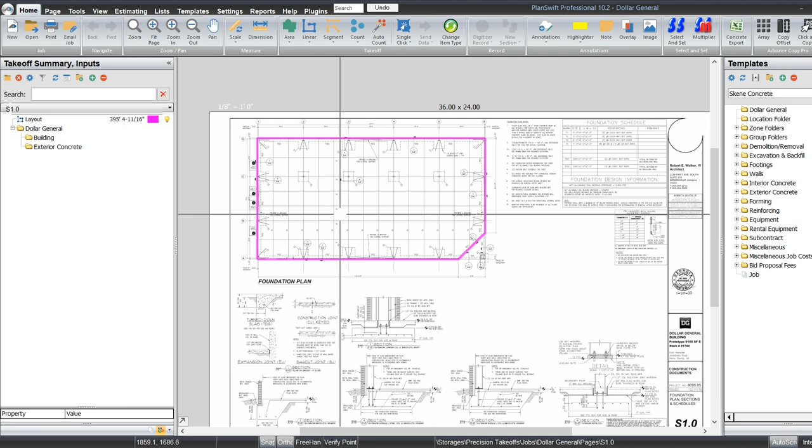I already got my folders put in there. We have separate videos on that, obviously, if you want to use the folders and how to use the folder structure. So we'll just get going on the takeoff here. The first thing I'm going to do is jump in and get these interior footings here. So we got some F3s, 6x6x2. So we'll just jump in here to our footing folder and grab some stuff and start going here.

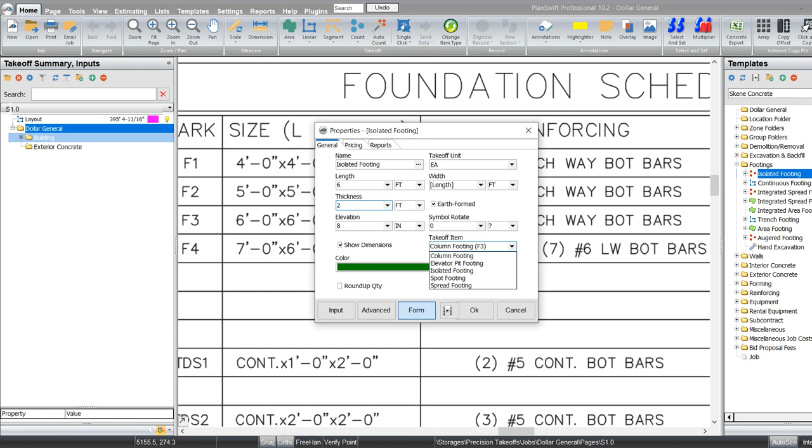So again, all the assemblies are drag and drop, even the digitizer ones. I know the standard PlanSwift assemblies are not like that. You cannot drag and drop them. But ours within our plugins are. So we'll just input the information that we need. That will be earth formed. An elevation, we'll have to check on that. And I always name them here just so I can keep it straight which ones they are. Looks like that'll be good there. And we'll pick up the rebar, 7 number 6s each way. We'll pick that up here in just a minute.

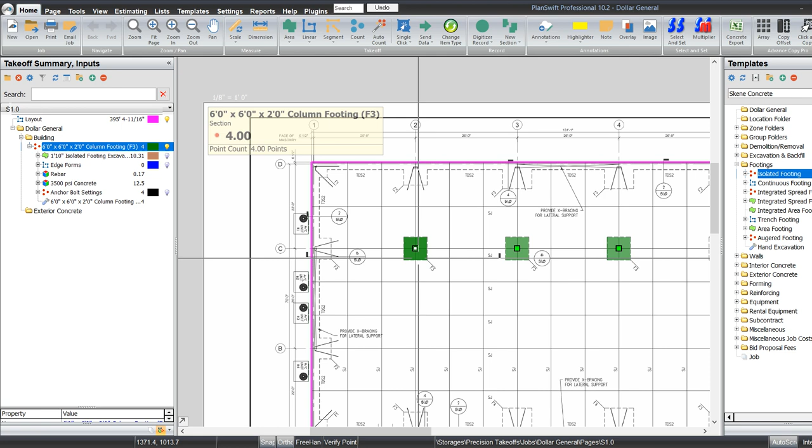So we'll go ahead and just draw these out real quick. And there we go. And we'll just move them over. There we go, we got those drawn out. And again, we had 7 number 6 bars each way. 1 mat, 7, make that the same, and those need to be number 6s.

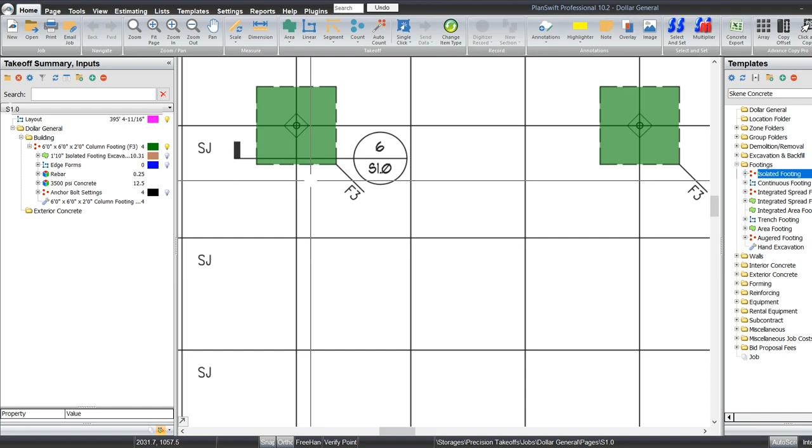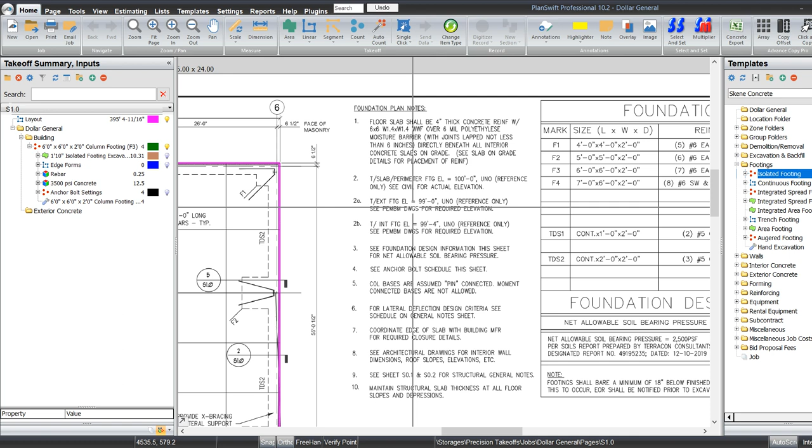Alright, let's just look at the detail real quick. I've done these enough, I'm pretty certain I know exactly what it's going to look like. Where are we at here? Right there. So yeah, just a standard column footing. It's just going to be earth formed. And top of the footing elevation, we'll have to see what we got here for that. 99'-4", so 8 inches down, and I'm pretty sure we're preset at that. Yep, we are. So we're good there. Those just have an anchor bolt coming out of them, no columns, no piers on them, and that will be it there. Those are done. So let's move on.

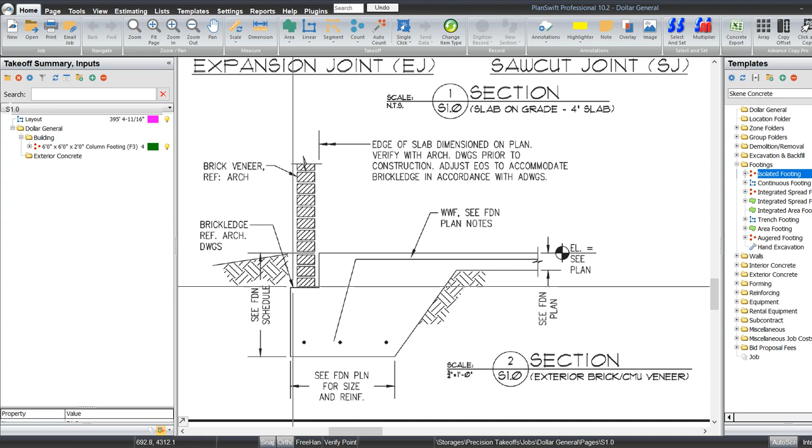And this particular Dollar General, I think it was down in Georgia, I believe. Yes. So for the detail here, we don't have a typical foundation, I guess you'd say. We just have a turn down slab with some ledge in it there for the brick. And some of the footings on the exterior, like right here, are just tied into that turn down edge, which would be right here. So pretty simple, just a little bit different way of doing that since they are all one continuous pour. We will just do it as a turn down edge.

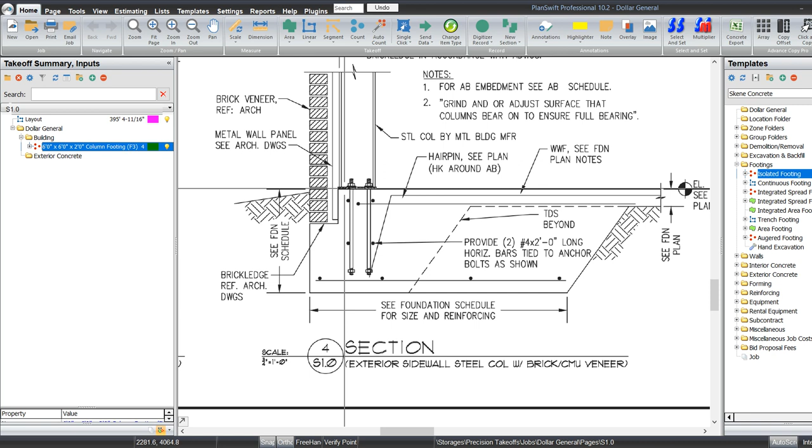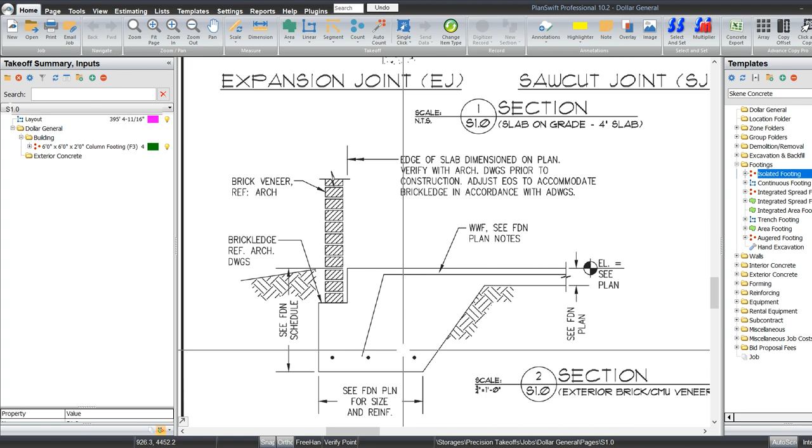We'll just throw the bar in there instead of doing the actual footings themselves, because that way we'll be able to pick up the extra concrete right there that we would not be able to pick up if we did them with the count item. Plus they're part of the floor slab pour, even though they are a footing. So what I'm going to do is draw my slab all the way out to this corner here, all the way down this edge here, and all the way out to there. And I'll come back in, put a ledge in there, pick up the turn down edge, the thickened concrete along the side, the rebar obviously, and we'll just jump right into doing that right now.

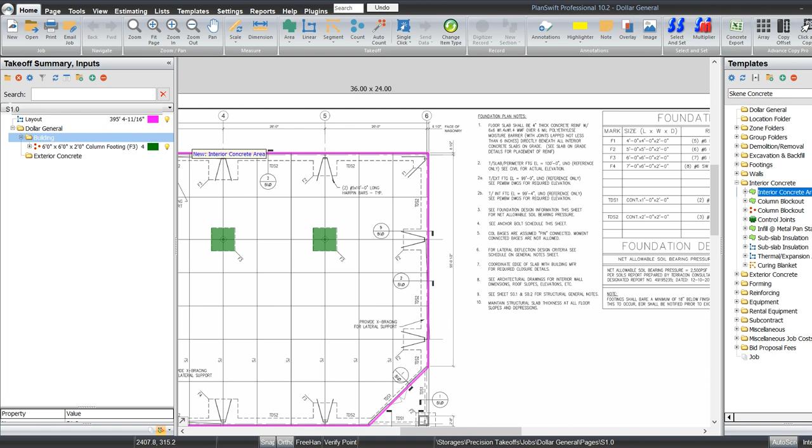I'll look at it here, but we're going to have a 4-inch slab, yep. 6x6 mesh, 6 mil vapor barrier. Okay. So again, we'll just take our interior concrete assembly, drop it in there, and the input window will pop up for us here. And we're just doing a 4-inch slab on grade. We'll worry about the details and specifics on it in just a bit. You'll see that I already have my layout done. That just makes it so I can snap to all the lines and points that much quicker. And this here, well, I don't know if that's supposed to go all the way out there or not, but I think we'll just do it out to there anyway.

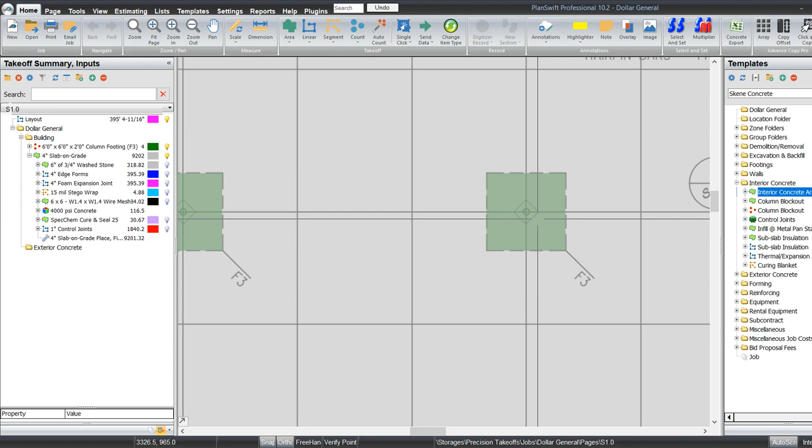Okay. So there's our slab. Obviously, we're gonna have column diamonds on top of there, as shown in that detail. Where's that at? Right here. So we'll have those to take out. We'll do those after we actually digitize the blockouts in there.

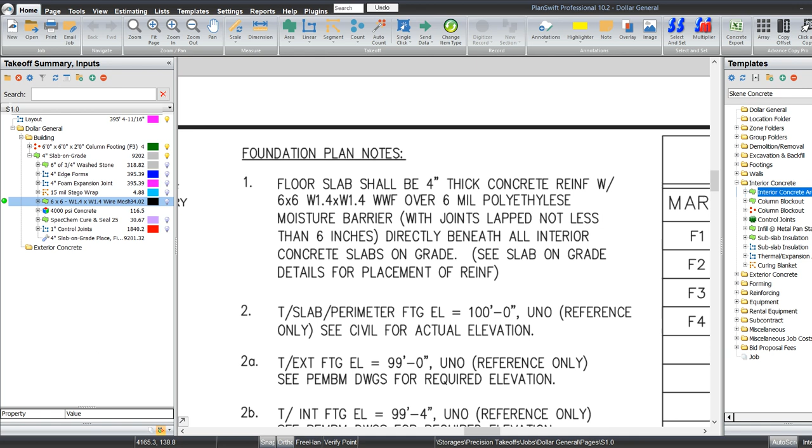But really, all we have to add here on this floor slab is, so you got a 6 mil vapor barrier. I'm going to leave that at a 15 mil Stego because I'm almost certain that's what's going to be required. 6 mil on a job like this is pretty rare anymore. We got that correct. And we'll have to check the geotechnical report for the subbase, obviously. I believe we're going to run into 4 inches on that. So I will just set that right now.

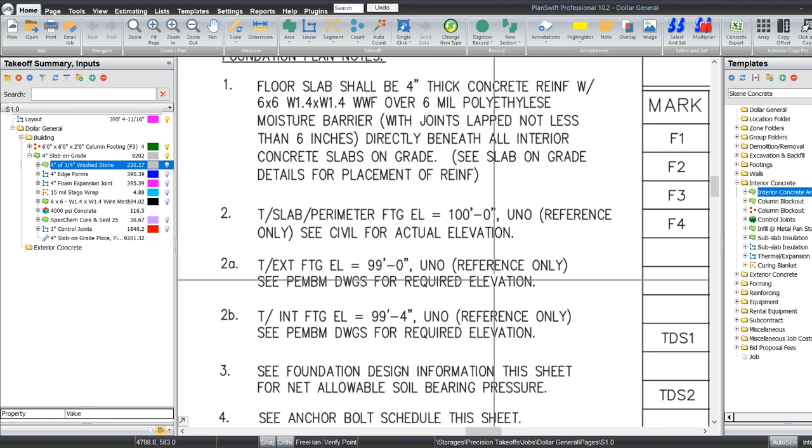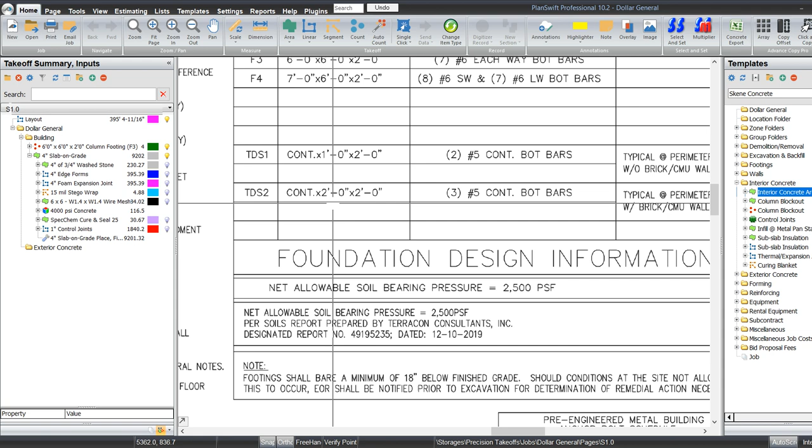And again, as I was saying, where's it at here? So yeah, we're going to have a 12-inch turn down edge. I don't know if it tells us that here. It does not. Actually, we might not, because I actually do turn down slab 2. Continuous by 2 by 2, so we're actually going to have a 24-inch edge there. So right off the bat, I'm going to change this to 24-inch plywood forms, because we're going to form that edge up. And if you've been paying attention with the videos we've previously done, you'll understand what's going on here.

Okay, so we're going to have that. We are not going to have any expansion joints. We can get rid of that one. And this here, since we have a turn down edge, we're not going to be taping the perimeter. Here in the Midwest where I'm at, we are required to tape the perimeter when we have foundation walls. Tape it onto the wall. That obviously is a non-issue with a turn down edge like that. And we'll look at the specs later and change all the concrete in the reports. Probably going to run into a 3000 mix, I'm sure. We will worry about that later.

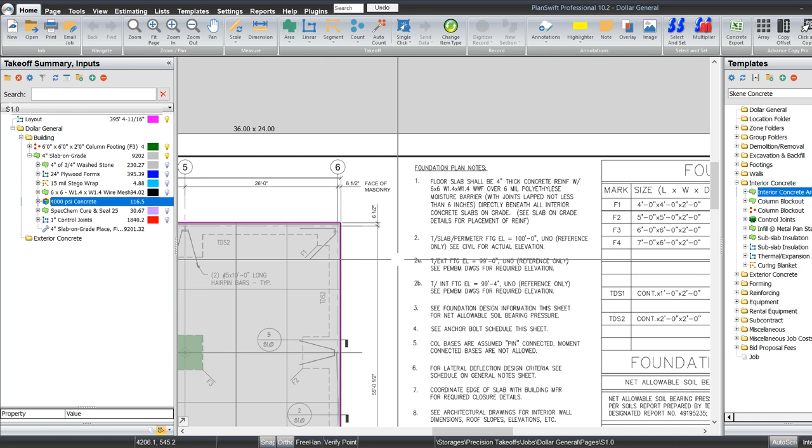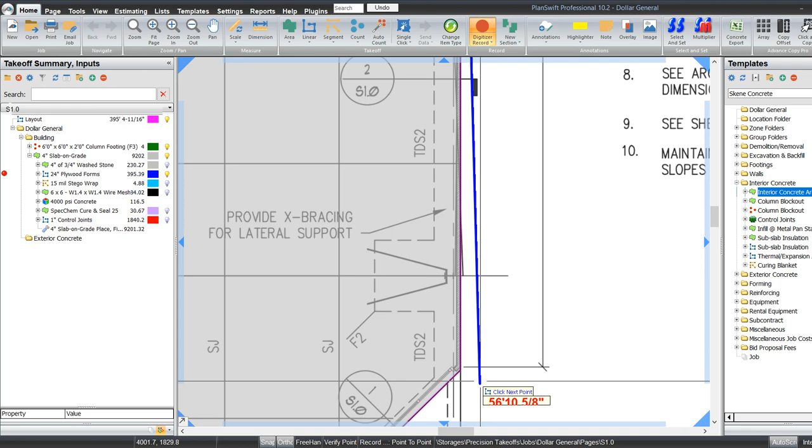So really what we need to do is, let's just start going down our list here. And turn this up to, okay. Alright, so the reason I got to draw this out here instead of just taking the perimeter, and you'll see that it's going to look the same right now until we change it, but the reason, again, it takes the entire perimeter. Once I draw it out, you're going to notice that number is the same. That number will change once I start deducting these here, and I don't need 24-inch plywood forms on those column blockouts. That's the reason I had to draw that perimeter out there.

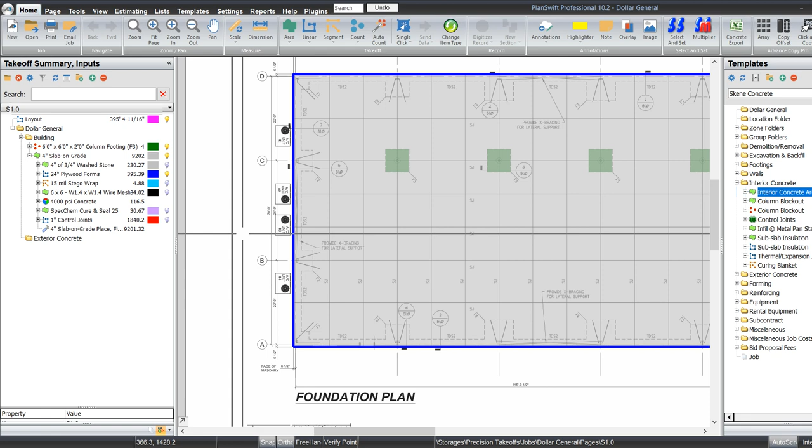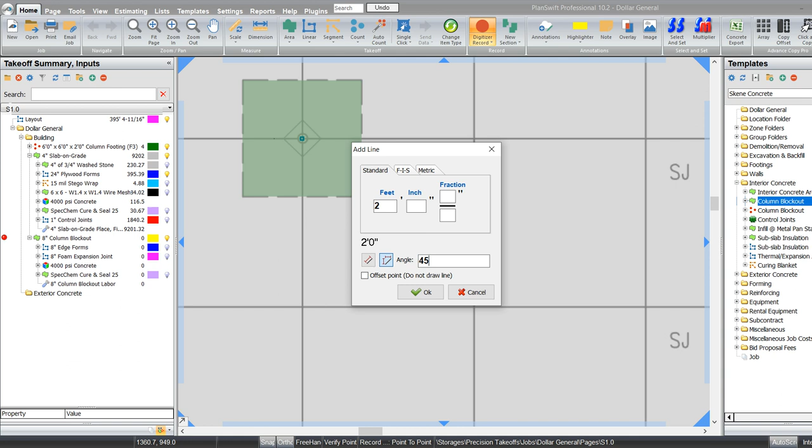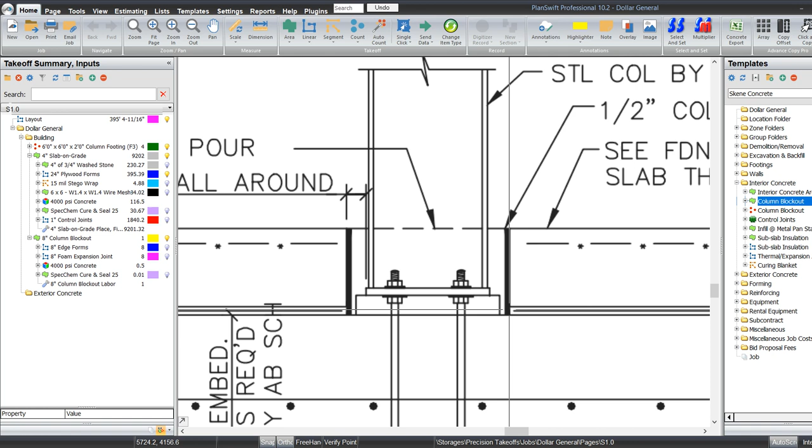And let's just get those knocked out real quick. Those footings were down 8 inch, so those are going to be 8-inch blockouts. And I always do a minimum 2 by 2 regardless of what they show. And okay, for those, again, those are just going to pick up the entire perimeter with edge forming and expansion joint also. And yes, expansion joint does go all the way down. Sometimes it only goes down the depth of the slab, which sometimes is only 4 inch. They don't pour the slab all the way down, but in this case they do. So we've got that taken care of.

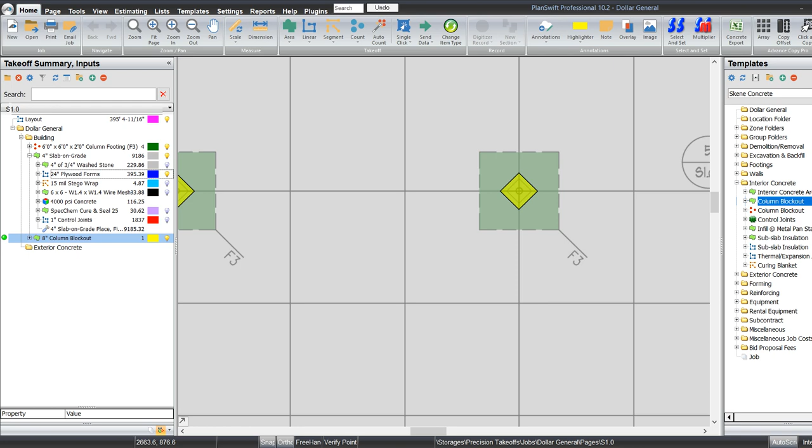So let's just copy that over. So to do that, I'll just shut that off. And there are those, and now we'll deduct the slab from that, and this is where you would have seen the edge forming change if I did not digitize it on the outside, but since I did digitize it, it will stay the same. Okay, there's those, there's our edge forming in there. Again, we'll change the concrete later, and we'll worry about sealer later. It will be a different type of sealer, I am almost positive, but we will worry about that when we get to it.

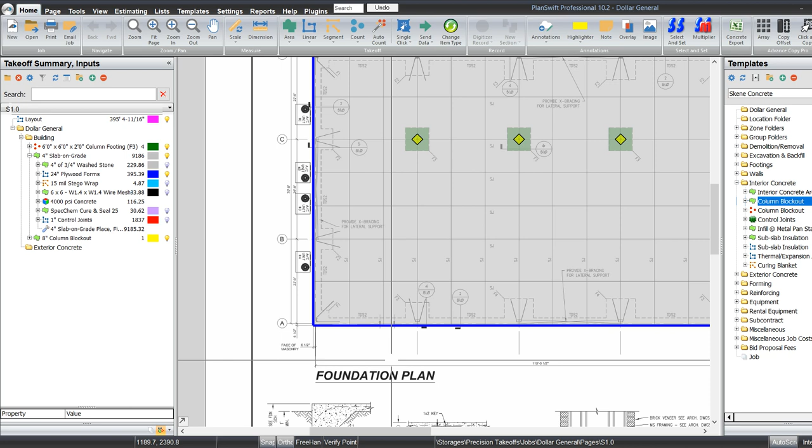So what I'm going to do, to pick that up, I'm going to drop that in there. This is just our thickened concrete. The segment part and the linear part are exactly the same. The segment just starts over for you every time you click a point. The linear, you can keep on clicking. Other than that, no difference.

So I'm going to go 48 there, 24 there. We got one slope side. We're going to do a 1-to-1. Actually, we'll check that out. It might not be a 1-to-1. And again, I'm going to label these. There's an F1. And we are going to machine excavate that.

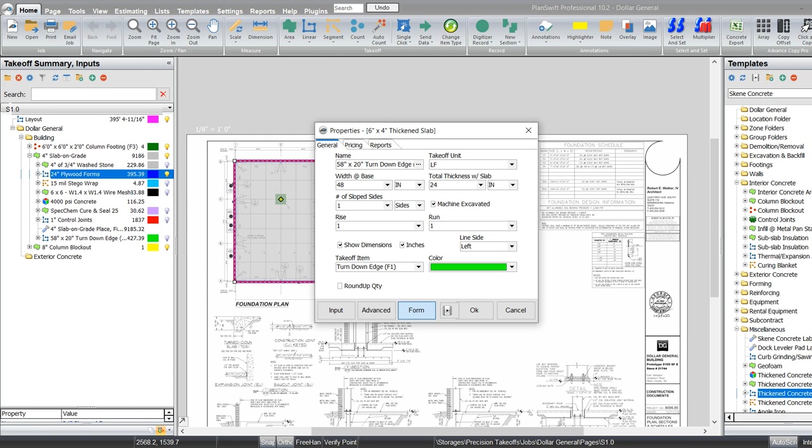And it does not give us, I guess I could scale it out. Worst case scenario, it's going to be a 1-to-1. Looks pretty close to me without scaling it out. I'm going to leave it at a 1-to-1 anyway since it doesn't specify. So here's how I'm going to do these. What this is going to do, you can see that's going to draw that out.

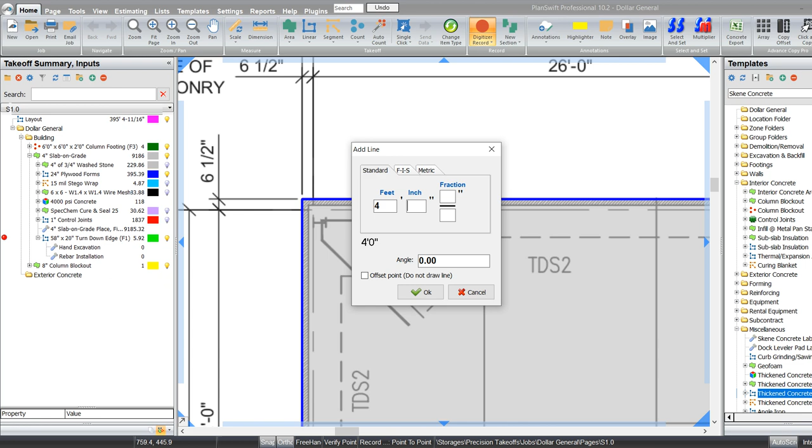So what I'm going to do is that distance this way is 4'0", so I need to be 4'0" the other way. What that's going to do is pick up where that would actually meet up with the other concrete. You see now I'm the same distance that way and that way, because this is the part that's sloping up, because we need a minimum 48 inches, which should be this number, correct? Yep. So we need a minimum of that. This part outside of there is the part that slopes up to it.

So let's just go around. We know we're going to be 4'0" on all these. The F1s are probably going to be just in the corners, it looks like. And it doesn't matter which way I go. Whether I go this way or this way, it's going to be the same thing. And probably just one more in this other corner. Yep. And that should be all of them. Did I get that? Yep, got that one.

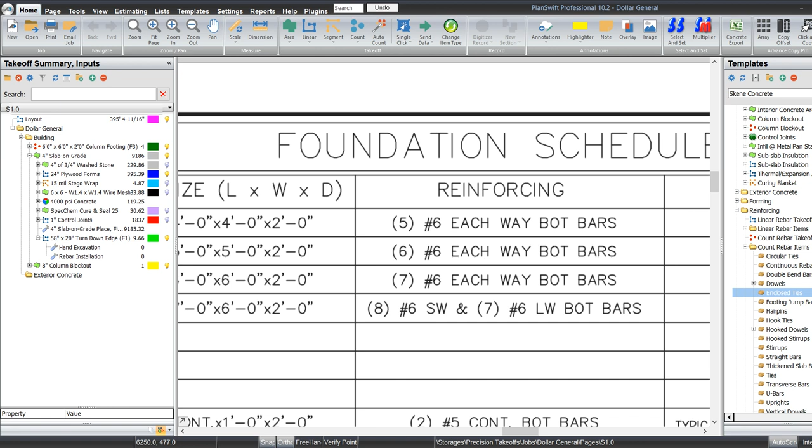Okay, so now we just need to throw some bar in there, and once we get one of these set up, we can just switch it pretty easily. So we need 5 number 6 each way, so that'll be easy enough. Let's go to our reinforcing and our count rebar items. And we're sharing these templates through OneDrive, so it's going to take a second here because I haven't used them for a little bit. So I'm just going to take this part here.

Let's see, I'm 48. I need to be 48 minus 4, so 44 inches long. And what was it? 5 number 6s each way. 44 is going to be 3'8". That was 5 number 6s each way, so that's going to be 10. And I will just name it that.

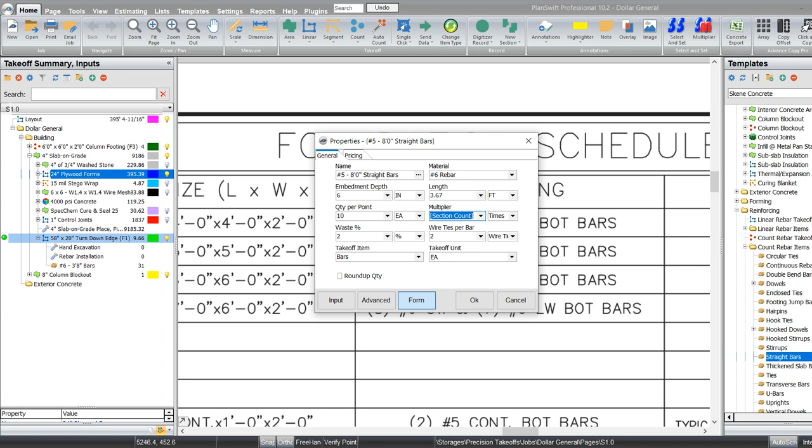And I want to do a section count, because if I do a section count, that's going to give me 10 of them at each section. I have 3 sections. If I did point, that would give me 10 at each point, and I have 2 points on each one. I think that's right, isn't it? 5 number 6s each way. So 10, 20, 30, with a little bit of waste, we get 31.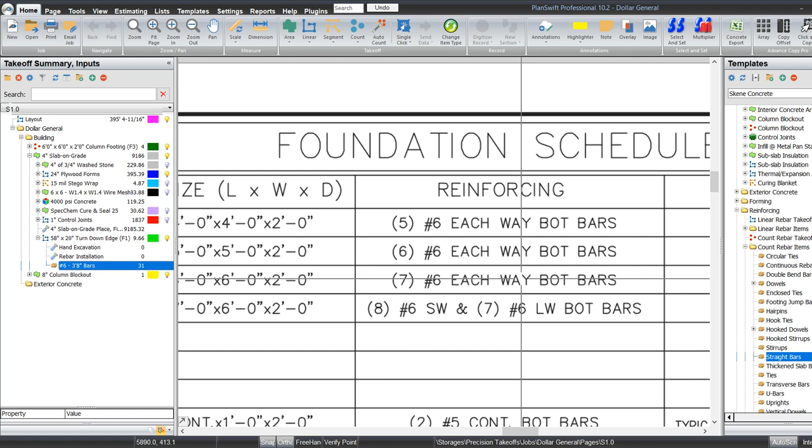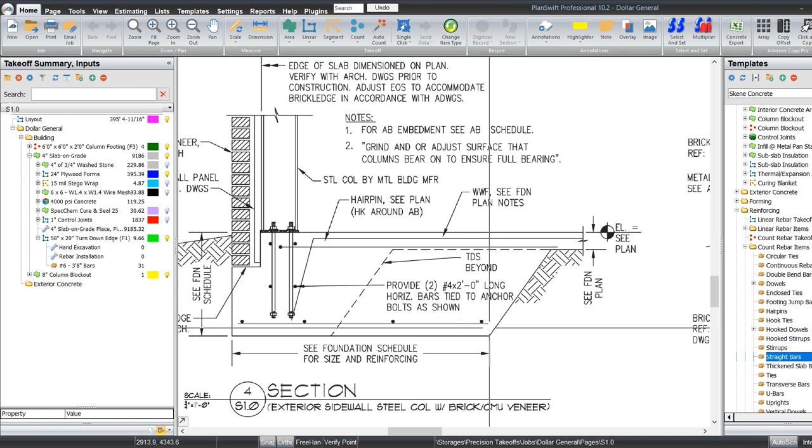The reason I did the 3'8" is because I got 4 foot minus 2 inches of cover on each side. So essentially that 4 foot is this measurement here, and that's where the bar would need to stop at. And it might be 3 inches back that we need to be, but I'm going to leave it at 2. If anything, I'm going to be 2 inches long on that bar, an inch each way, but I'm going to leave it there.

And what else are we going to have here? Two number 4 by 2 foot long bars tied to anchor bolts. Okay, so I need 1, 2, 3, 4. So basically I just need to duplicate those, and at each section I'm going to need 4 of them, 2 foot long number 4s, and that'll get the bars tied to the anchor bolts on them.

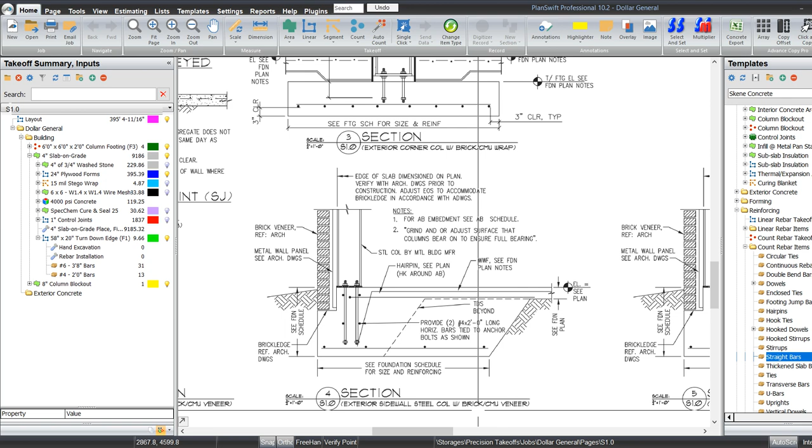Actually on all of them, because I don't believe the corners, I think they're all, so the end wall and the side walls are different maybe. Exterior side wall, steel column with CMU veneer. Yeah, the end walls and the side walls are different. See, I don't know what that one there is. What's that?

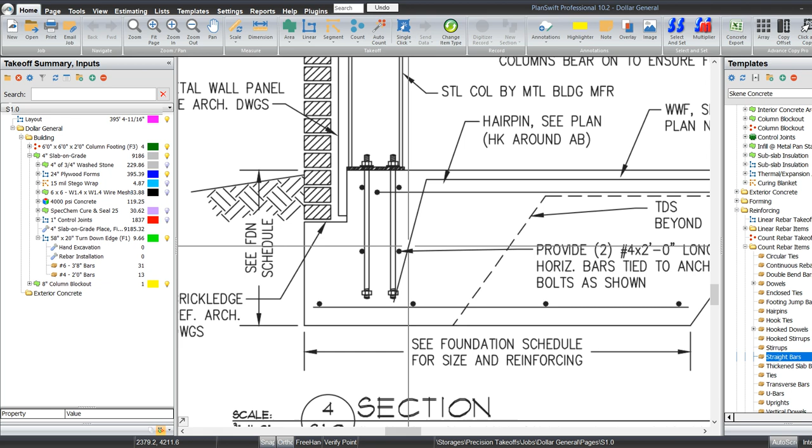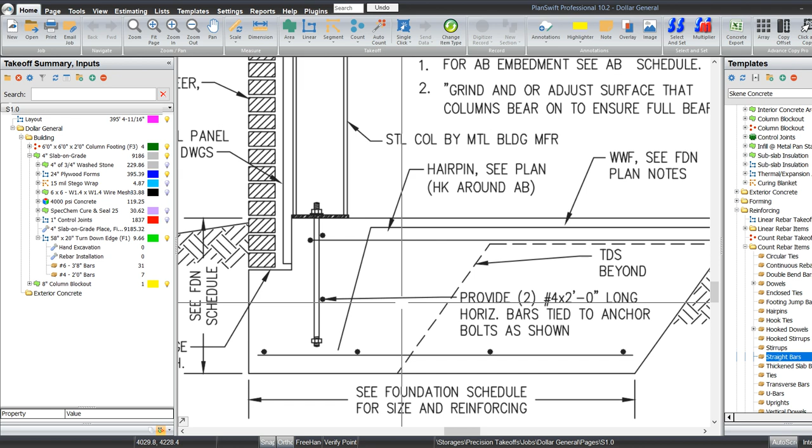So there's only 2 of them, so I need to change that. So instead of having 4 at each one, I just need 2. I'm assuming top and bottom is the 2 they're talking about, not side to side, because they have the same thing right here, and they just have top and bottom. Again, this detail goes to nothing right there. So I'm just going to assume that they have top and bottom, and that maybe that and these 2 here, the bar going through that turn down edge, is what I'm going to assume for now.

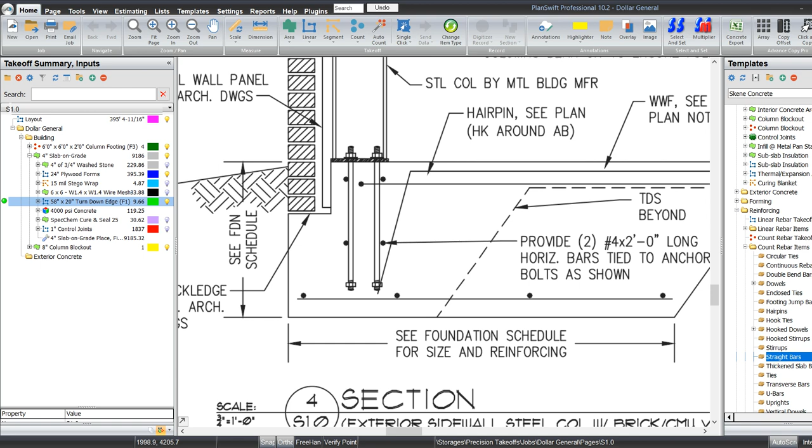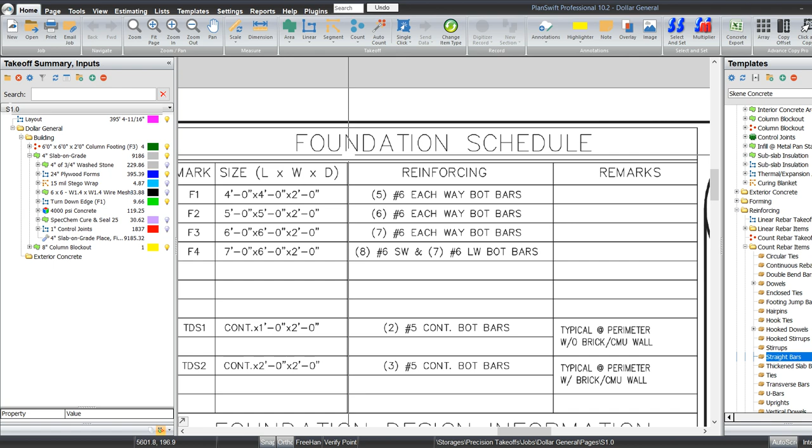So we'll just move that up, and now we can, actually what I'm going to do is I'm going to turn that off so you don't see all those numbers. I just see that that's an F1. So now we got some F2s, so we'll just duplicate that, do some F2s real quick here. 5 by 5, we're going to be 60. F2.

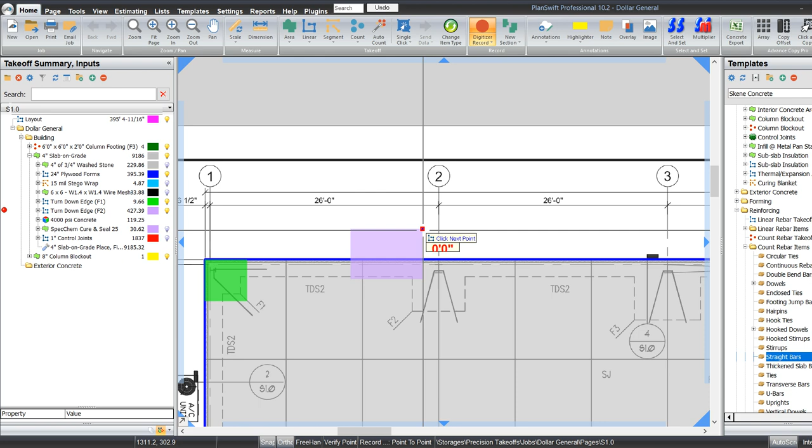And let's change the color to keep it straight. And we got 6 number 6s each way. So we're going to have 12, and they're going to be 4 foot 8, 6 number 6s. And we're going to leave those in there. So let's just get those. And what are we going to have here? 5 foot 10.

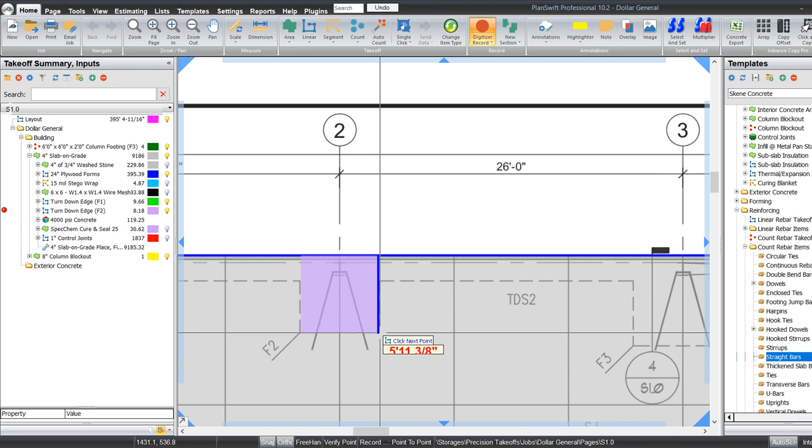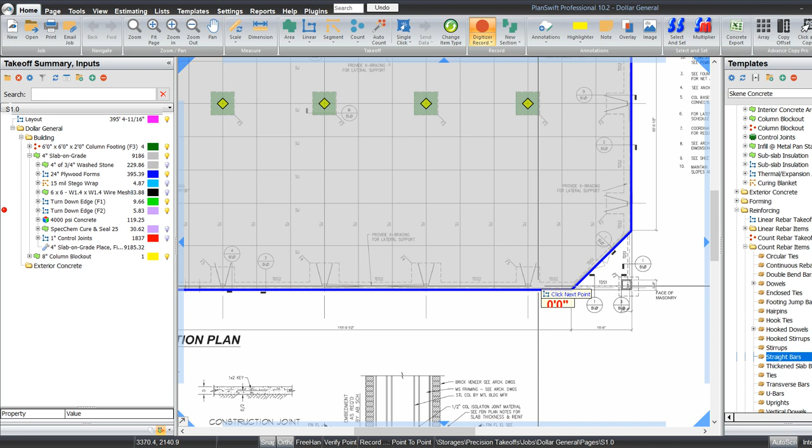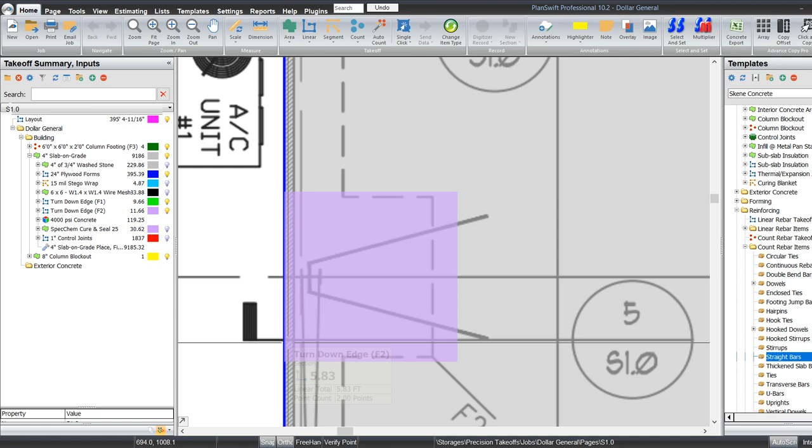So, wow, just not drawn to scale, I guess, huh? Let's go look at that again. 5 by 5, that's right. Okay, so we're good there. So we can copy that one over. Okay. So it looks like those ones aren't even drawn to size here either. Yeah. But we have what the size says it needs to be, so we're good.

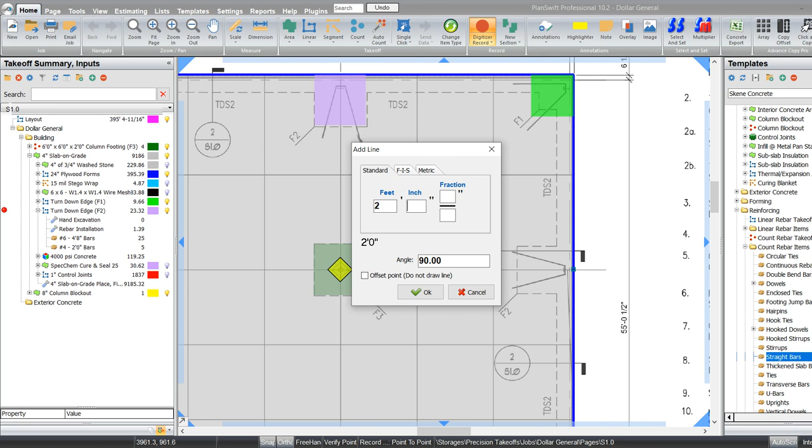And we got an anchor bolt setting. We got to add each one of those, so we'll have to get those real quick. Let's get that one. So there's all of our, nope, there's a couple F2s right there. Whoops. There we go. Alright, let's add our anchor bolt settings to there before we forget. And the anchor bolt settings are going to try to go by point count, but we want it to go by section count.

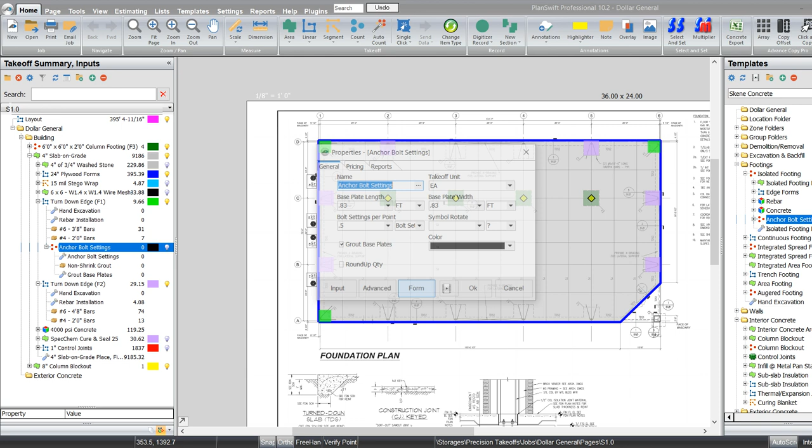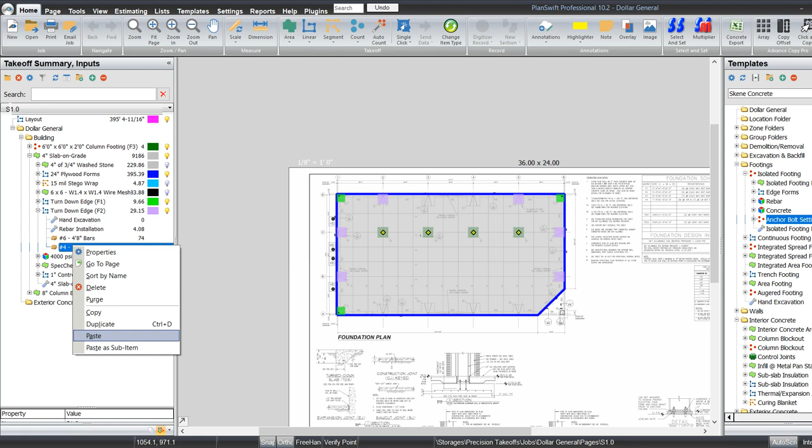I don't know if we can do it this way. Nope. 0.5 doesn't work. So we're going to have 6 unless we come in here and click them. Seems like an option we could add in really quick to do it by the section count instead of a point count. Maybe we'll get on that someday here. And then we'll just have to come back through and hit one on each one of these, and all this is doing is picking up labor for setting the anchor bolts and grouting base plates, obviously. It's not picking up any material that's going to be supplied by the steel contractor.

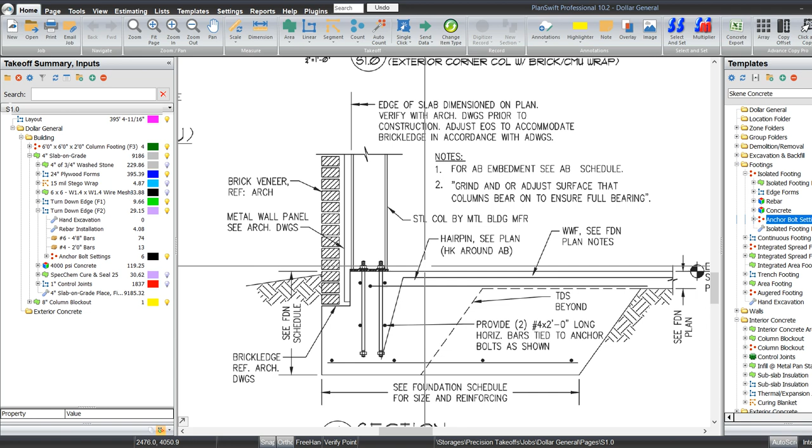I do see one thing we're missing is the hairpins. Hairpins. See plan. I don't see anything. There we go. 2 number 5 by 10 foot long. Two number 5 by 10 foot long hairpins. How are they putting 2 in there? Must be what that bar is. That's a hairpin right there. Ah, there it is right there. It does show it.

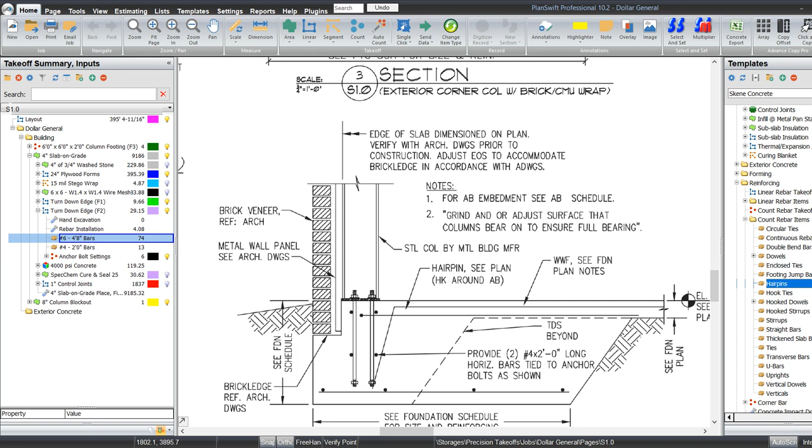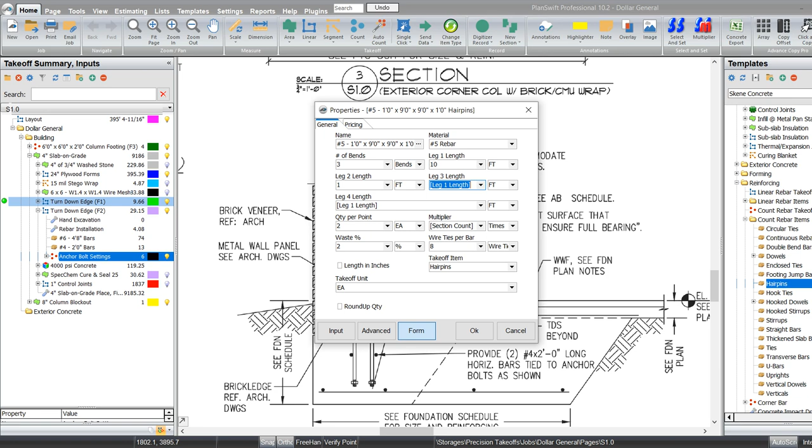Okay, so let's add that real quick here. Where are we at? There we are. So we're going to add hairpins by the section count again. Quantity per point, we're going to do 2 number 5s. So let's do 10 foot long. I don't know. I suppose that means it's going to be 10 foot on each one. 10 by 1 by 10. I'm guessing.

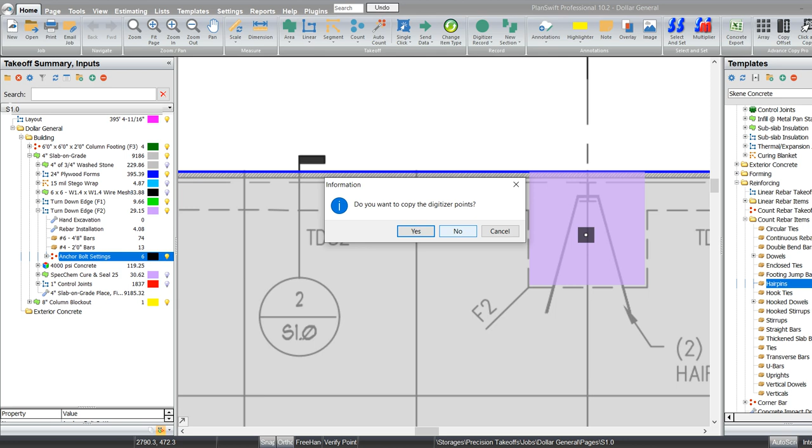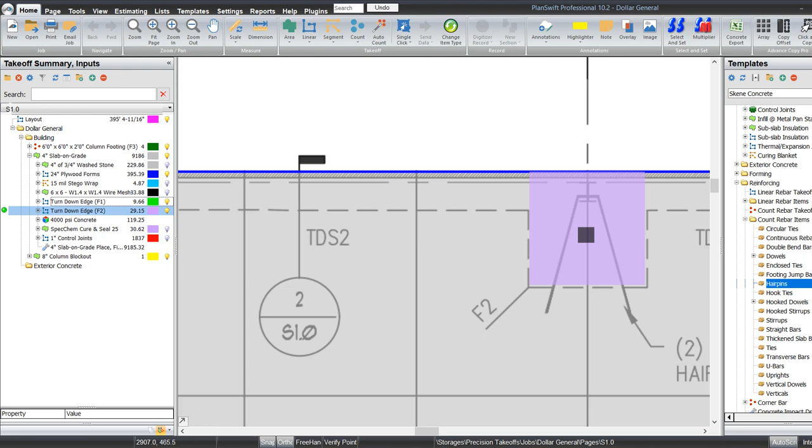I guess the way I'm seeing that, if it's 10 foot long, it's supposed to be 10. Need about a foot there to bend it over and 10 back. Could be wrong on that, but they really don't have much for detail. I think that would be enough, though. Or no, it can't be 10 by 1 by 10. We'd have to buy 21 foot bars. So let's change that. Let's go 9. Go 9.5 by 1. 9.5, I should say. Let's do that. So there's our hairpins. We've got those bars. We've got the anchor bolt settings again. Now we're ready to move on to number 3 here.

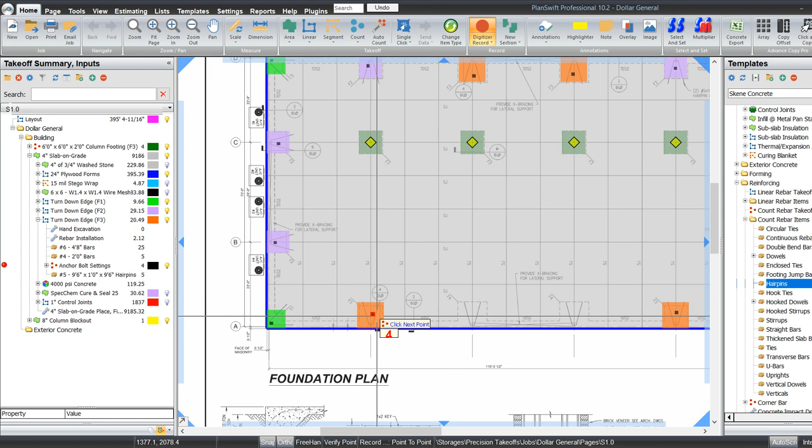6 by 6 by 2. Okay. And this one, 6. So now that we got it figured out, that we're done that quick, and F4s are 7x6.

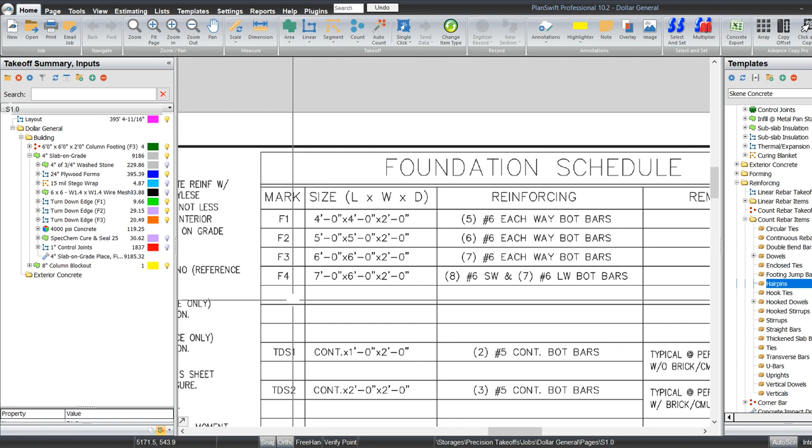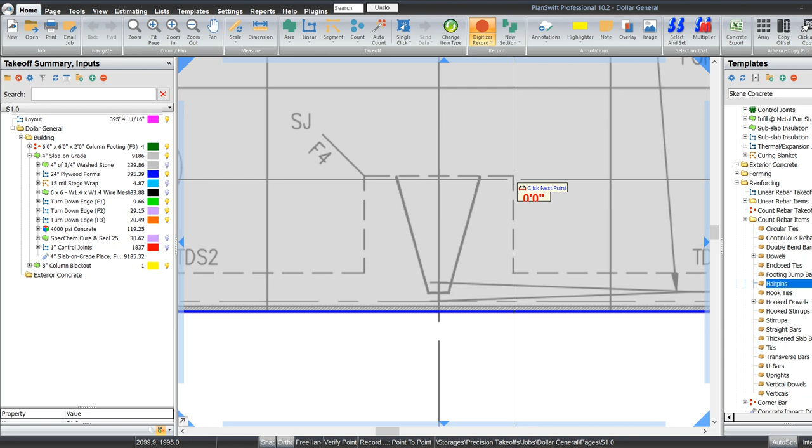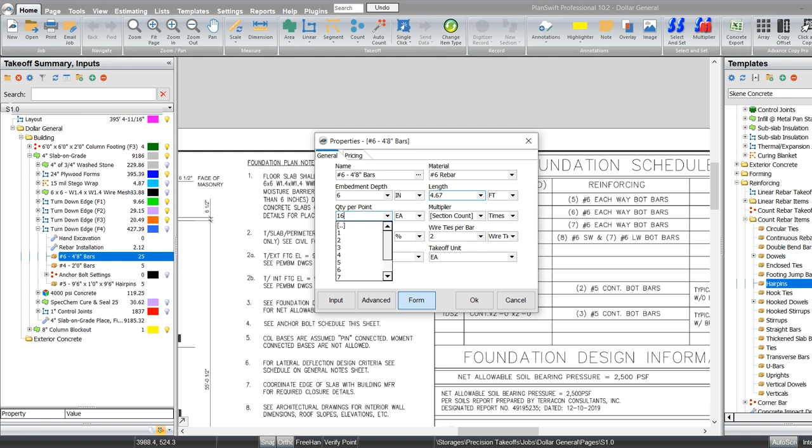Which way's the length and which way's the width? Seven, 6. Tell you what, there's only a couple of them. I'm going to do them F4 7x7. Make it easy. And 8 number 6. I'm just going to do 8 number 6s each way. So 8 and 8, 16 number 6s. And those are going to be, there we go.

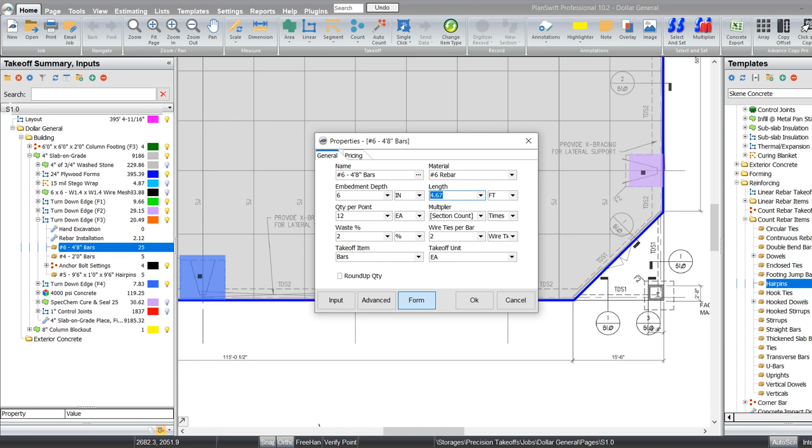Okay. And I believe we forgot to change our rebar on our 3s. Sure did. That needs to go to 5'8" because those were 6x6s. And there were 14 of them. Okay. There we go. Okay, now all we need to pick up is the turn down edge in between all of them.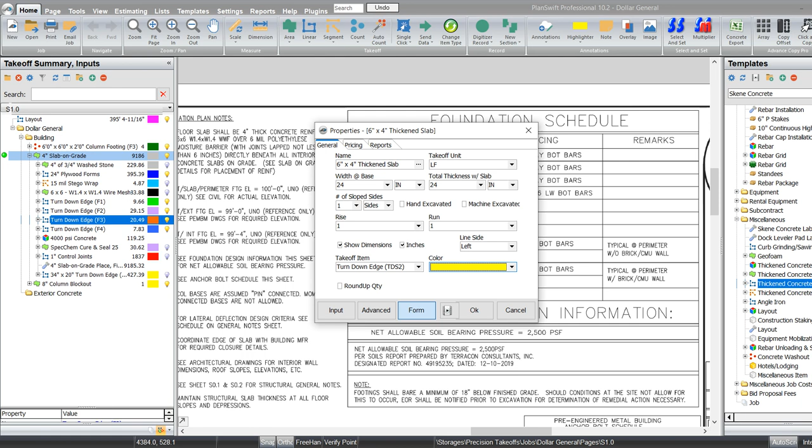Which is the TDS2, 2x2, 3 number 5s continuous. So I'll just grab a new one here. So we're going to be 24 and 24. Turn down edge, TDS2. And a 1-to-1 again, one slope side, good enough. So now,

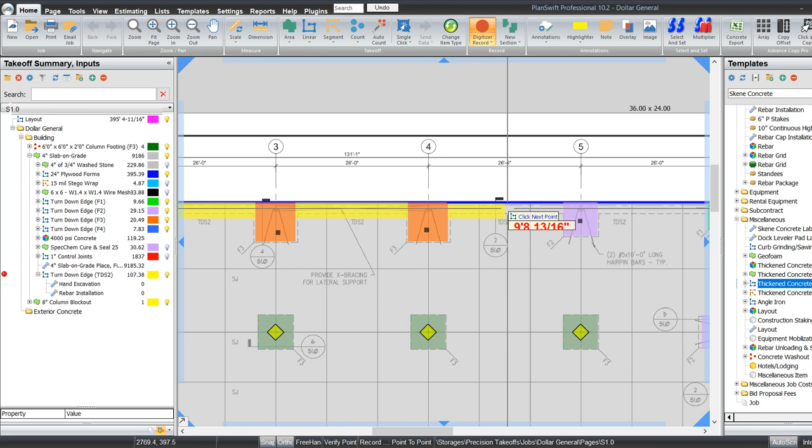for the purposes of picking up the concrete, I just need to jump in between all of these because I'm already picking up solid concrete all the way to the top on the rest of them. After I digitize this, I'm going to have to come back and digitize once around the perimeter again, but I will show you a shortcut on how I can get all that, because I need to pick up the bar through those footings on these 3 number 5 continuous bars that we have.

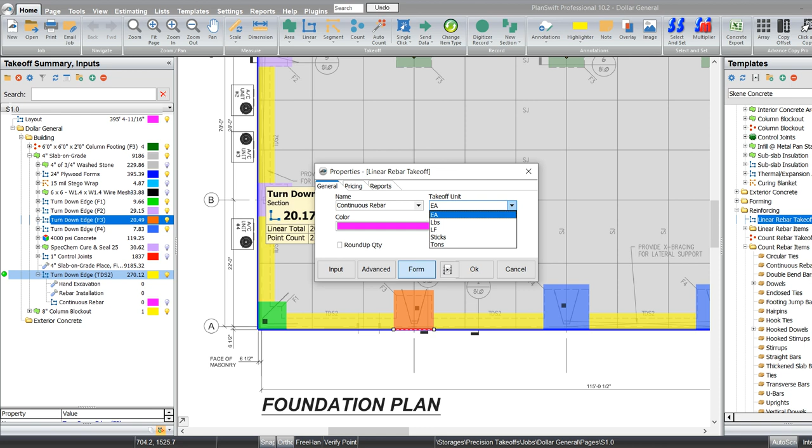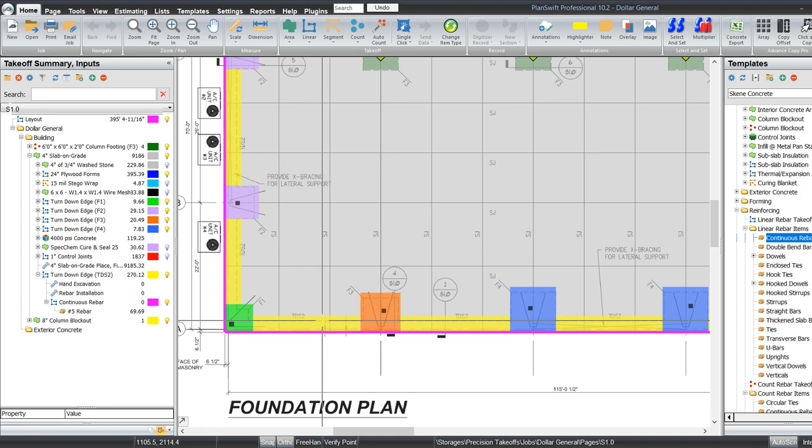So what we need to pick up here is this continuous bars. So there we just picked up our linear, so we didn't have to draw it out again because we already had it drawn out. And now we'll just put this in there until we need 3 number 5s. And now we've picked up those 3 number 5s that go in that TDS2, which is those right there. TDS1 is 1 foot wide, 2 foot deep, and I think that's right here. Sure is.

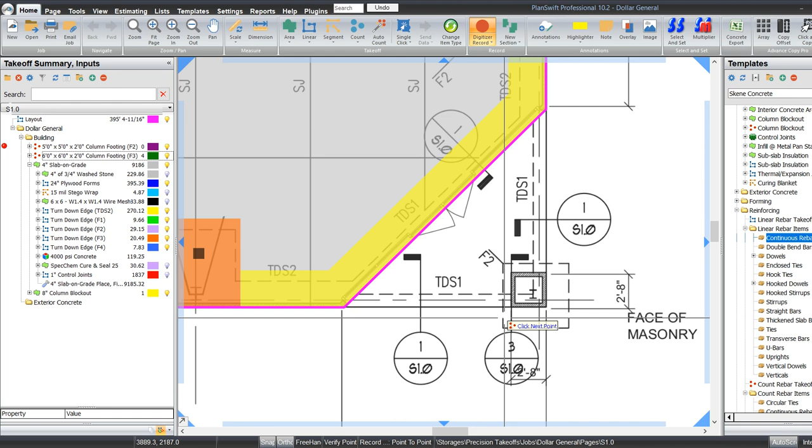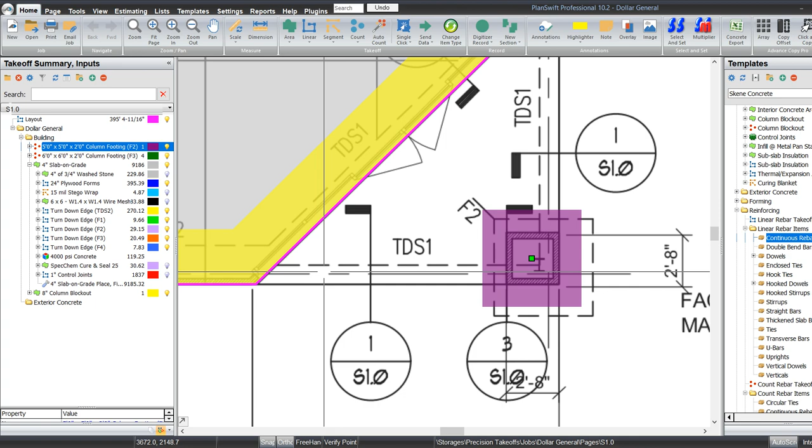Okay, so it looks like we have an F2 right here we got to pick up, 5x5x2. Let's just duplicate that. 5x5x2, column footing F2. And let's just change the color for us. And we got there? Wow. Looks like that lines up with that. So that's the outside. But that thing's not centered on there for some reason. Not that it matters here. And it doesn't give us any information on where it is actually at. So we can't place it correctly, so we'll just drag it right there.

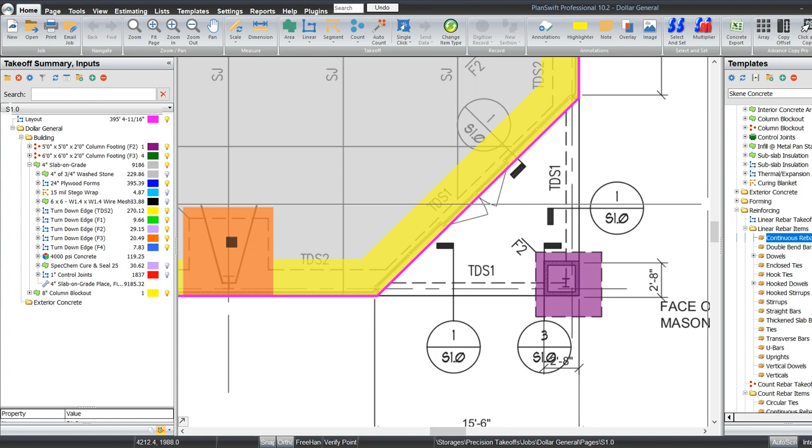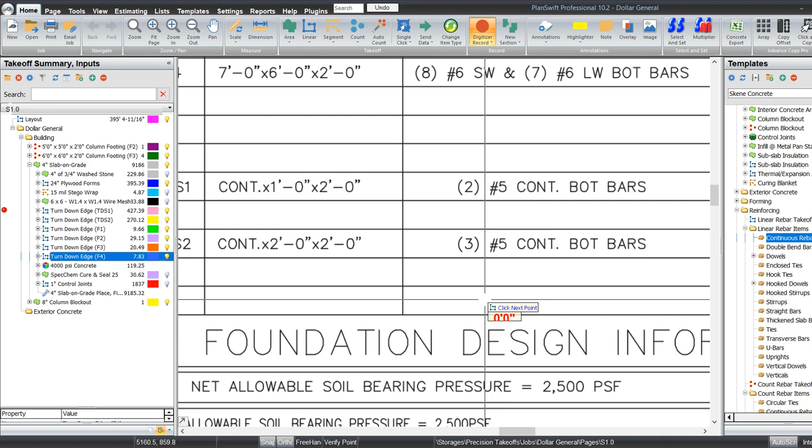So we also have that TDS1 that is almost the same as the 2, but it just has 2 number 5s, and it's 12 inches there. Okay. So we will just, and I'm going to double up the corner there just to make sure I got enough. I'm overlapping there. It looks like that was TDS1 there. Just a little bit extra. I'm going to leave it there. And looks like we're going to have that slab there too. So that'll pick that up. And this had 2 number 5s. Okay.

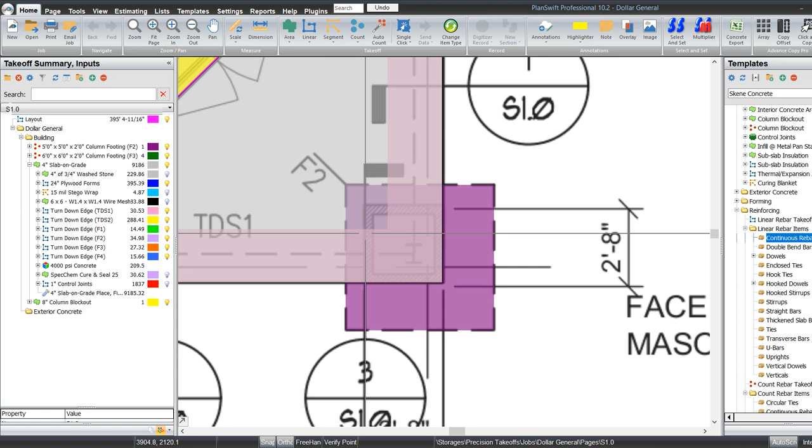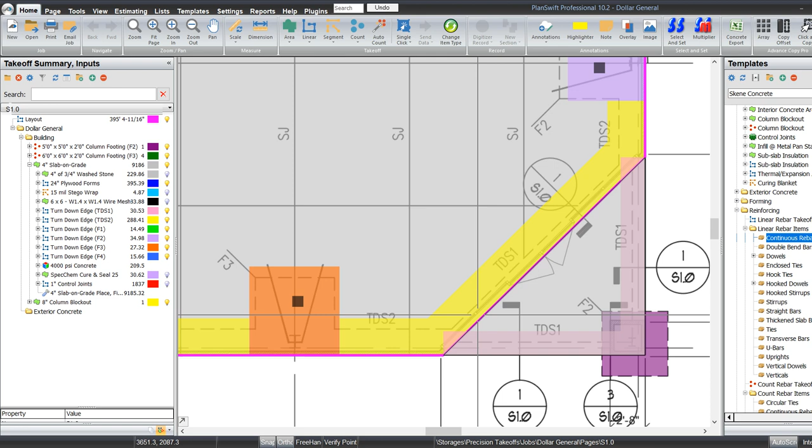What else are we missing here? Really is no column blockout there. And actually we're not even pouring over top of that because they got a little masonry column that they're putting on there, it looks like. Well, it looks like that's it. So yeah, the only thing we really didn't have right was that, and those F4 footings that we don't know which way is the length, which way is the width. And changing this to a TDS1, which isn't going to amount to much. Other than that, it looks like we got it, guys. Not much else going on here. Pretty simple takeoff.

I'm going to set some materials. Obviously, I'll do that in the reports. It's obviously the easy way to do it. Check some concrete on the specs. See what mix we need. We only got about 4 different items here, though, that need set, so that's not a big deal. Other than that, we got most of our material set here. It might just be a little bit of fine-tuning the correct material, maybe changing some pricing in the reports. But yeah, it looks like we got all our anchor bolt settings. We got hairpins in there. We got the bars in there. Got our column block outs.

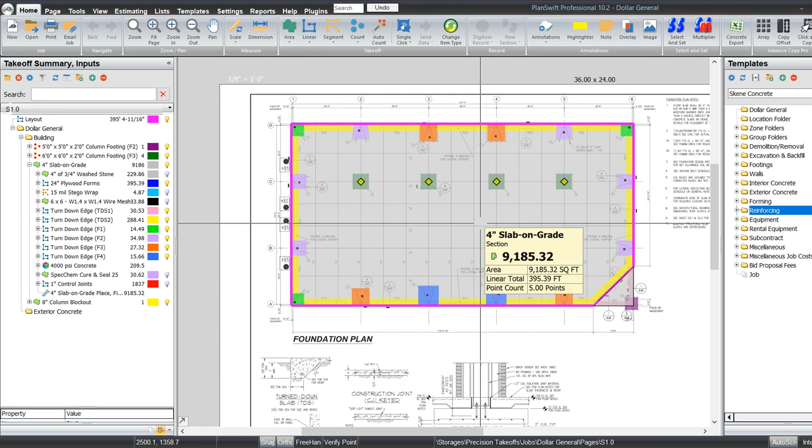There's our slab. I need to add a pump to the slab. Well, actually, these here, you got to pour solid all at once. So it'll be 1 pour, so 1 pump charge. But other than that, it looks good. Looks like I was just a little bit off. We're at about 33 and a half minutes. So pretty simple takeoff, pretty quick. Got maybe less than 10 minutes worth of work to do, and we get this slab done and ready to send out for a bid. So